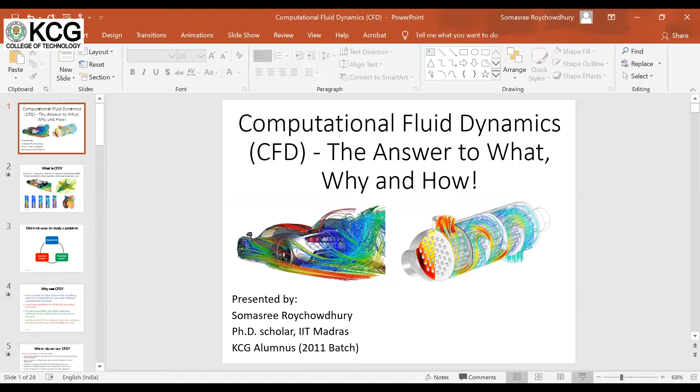Today I'll be giving my lecture on computational fluid dynamics. It will basically answer some very basic questions like what is CFD, why do we need to look into CFD, and how do we solve a problem using CFD. In this presentation, I will give a fundamental understanding of CFD. I will not go too much in depth, and I hope by the end of this session it will pique the interest of all students to go deeper and find more interest in understanding the subject.

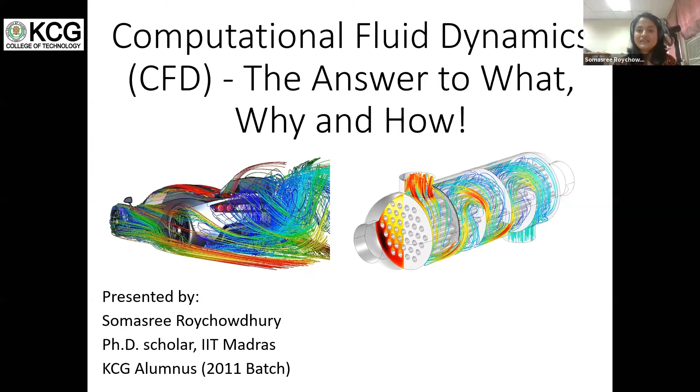So the first question: what is CFD? CFD is a computational tool that we use to solve any kind of transport phenomena equations with respect to fluid mechanics, heat transfer, or chemical reactions in any kind of system.

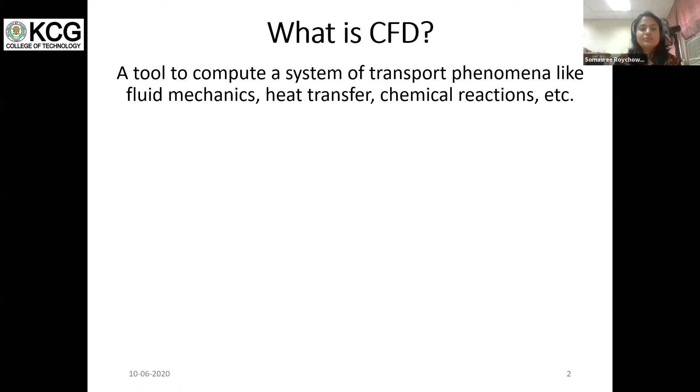For example, we may have an F1 car and we want to look into its aerodynamics, because at very high speed it is essential that the drag force acting on the car is much less. Only then can it move at very high velocity. So to study the aerodynamics of the F1 car and design and streamline the body accordingly, we can do something similar with fighter jets, or even look into commercial planes and their design, making them more aerodynamic while optimizing the energy we use.

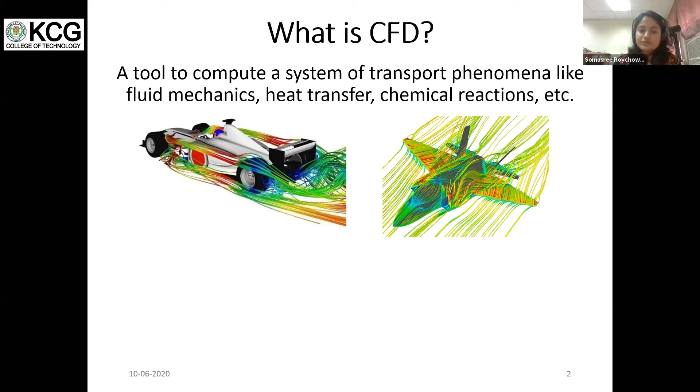Then suppose we want to study the burning characteristics of a fuel. Say we have a tray with kerosene and we're burning it. To study how exactly the flame behaves, we can do that with CFD.

Another application of CFD is in medicine. Suppose we want to design a pacemaker; we need to understand certain parameters at play inside our heart or in a blood vessel system. Using CFD, we can understand the flow of blood in and out of the heart, the pressure acting, and so on. With that, we can optimize the working of the pacemaker and design it accordingly. These are just a few examples of where we can use CFD.

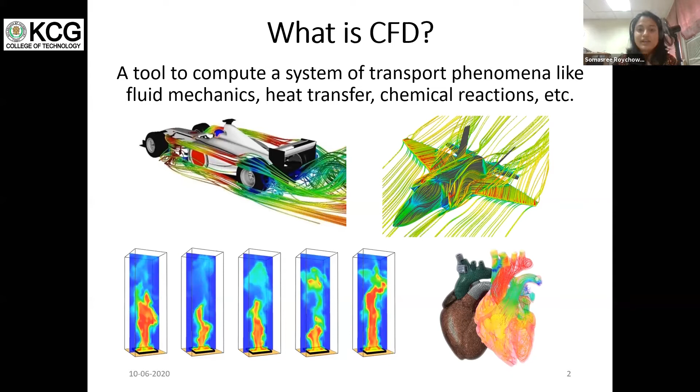Now, we can solve a problem in different ways. If we want to study the aerodynamics of a vehicle or a ship, we can study it experimentally using a wind tunnel or something of that sort, and figure out the parameters required to optimize the design aerodynamically. Or we can also do the theoretical analysis.

In theoretical analysis, we take a physical problem and formulate it in terms of certain mathematical equations, then solve those equations for certain initial and boundary conditions.

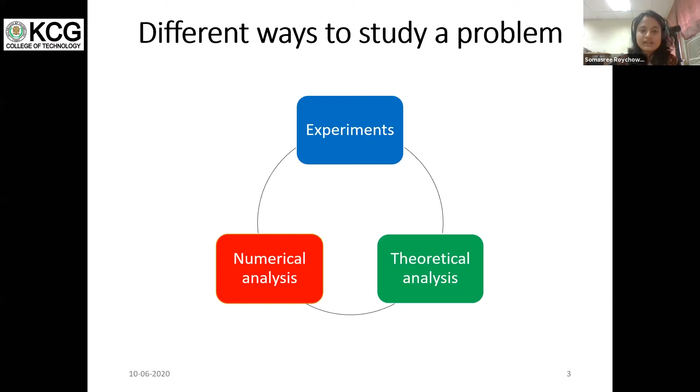The other way of solving a problem is numerical analysis. Here again, we take the physical problem and represent it in the form of mathematical equations, but instead of solving it like theoretical analysis, we solve it iteratively. So CFD is basically numerical analysis where we iteratively solve the mathematical equations and arrive at the solution. Now, why do we actually use CFD?

CFD gives an in-depth understanding with respect to flow patterns, which are very difficult to study experimentally. If you want to set up an experimental setup, you have expenses for purchasing and fabricating everything, then the measurement devices and sensors are expensive. If you just need normal measurements like thermocouple or pitot tube, it's not that expensive, but if you want a high-speed camera for flow visualization studies, that becomes costly.

So you can understand that experiments are a costly affair. But when you go for CFD, all you require is a computer. So the expense is that of a computer, and if you're using software, you need to procure the license. These are the only two costs with CFD, so it is cheaper in comparison to experimental techniques.

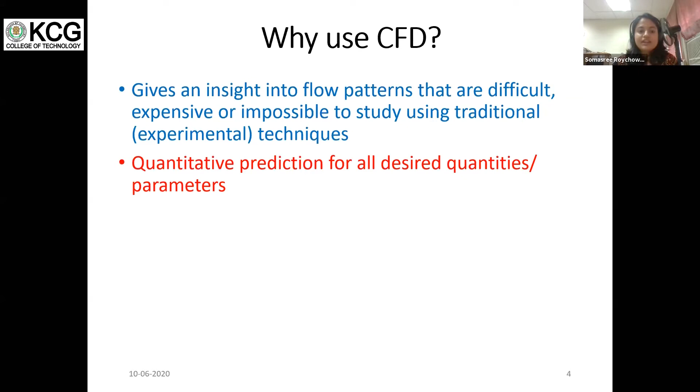In CFD, you can study various quantities and parameters, whereas in experiments you have a limited number of parameters you can study at one time. In CFD, you can study any kind of problem, using various operating conditions and simulating various types of problems with much lesser resources, that is just your computer. Finally, solutions from CFD are much faster than obtaining solutions from experiments.

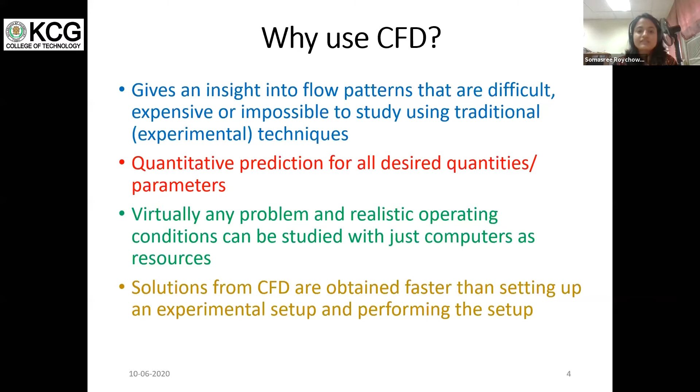In experimental study, you need to first set up your experimental setup, then do your measurements, then post-process your results and come up with the necessary graphs. In CFD, on the other hand, except for the time the computer takes to run your simulations, you can get your CFD results very fast. It doesn't take as much time as experiments. This is why CFD is advantageous.

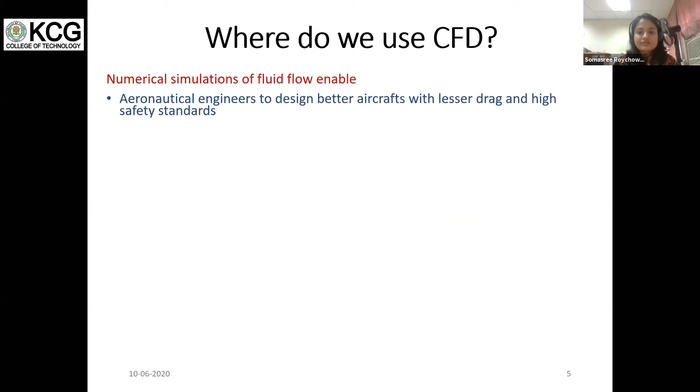Now, where do we use CFD? I've already shown a few examples earlier. A few more examples include design of aircraft for less drag and high safety standards. Space engineers use CFD for better shuttle and satellite design. Architects tend to use CFD for designing comfortable and safe living environments.

Most commercial buildings these days have centralized AC, so if you want to study how the temperature distribution is inside the room, whether proper airflow is reaching everywhere or not, all this kind of design for comfort can be done using CFD.

I've already spoken about vehicle aerodynamics. Coming to chemical engineers, whenever they are doing some chemical reaction study and want to maximize the yield of the reaction with respect to the equipment or the design of the reactor, they can also use CFD to study such problems.

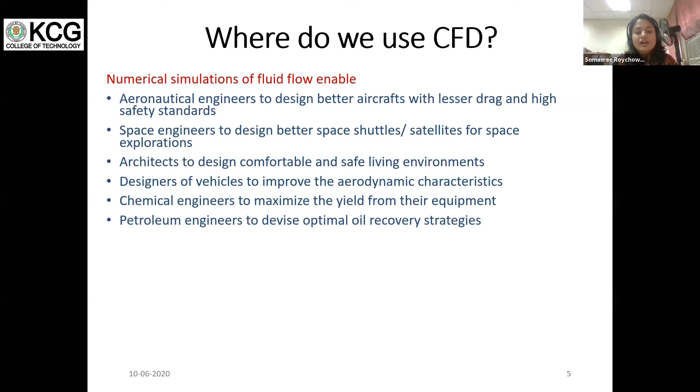Petroleum engineers can use CFD to come up with optimal oil recovery strategies at oil extraction plants. I've already stated the application of CFD in the medical field, be it the heart or the vein. CFD can even be used to study cell tissue mutating into cancer, and so on and so forth.

Meteorologists also use CFD to forecast the weather and warn us about natural disasters. There are certain health risks involved with respect to radiation, be it thermal radiation due to high temperatures or nuclear radiation. All these things can be studied using CFD, and safety experts can come up with the standards that are required.

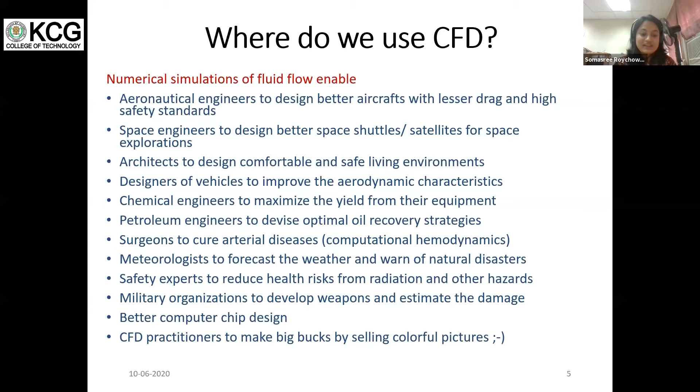Military organizations can develop weapons using CFD, and they can estimate the damage these weapons can do. And how do you think our computers and mobiles are getting smarter? That's because of better design of computer chips, which we can also obtain by using CFD. And finally, by showing all these colorful graphs, any CFD practitioner can make big bucks. So that's why we use CFD.

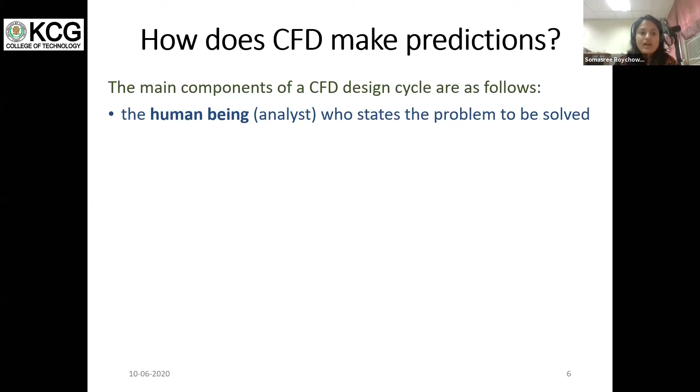Now, how does CFD make predictions? Let's get into that. What are the main components of a CFD design cycle? First, of course, we start off with a human analyst. A human being will define the problem - basically what are the flow parameters we are looking at, and what is the geometry exactly we are looking at. This is what is defined by a human being first.

Then, of course, we need scientific knowledge. If the flow is laminar, then we need to use a model corresponding to laminar. If the flow is turbulent, then we need to use the model corresponding to turbulence. So this kind of scientific knowledge is especially required to express these things mathematically.

Then, of course, we require a computer code. You can write the computer code, or you can use commercial softwares, CFD packages, which compute these mathematical models. Next, of course, computer hardware is very important.

I'm sure all of us have played computer games, and we know how painful it becomes when your games get stuck because your computer is not able to handle it. It's something similar with respect to CFD as well - the more complex your CFD simulations become, the more you need such a strong and powerful system. So hardware plays an important role.

And of course, finally, it again comes back to a human being who will inspect the entire simulation that's happening, and once the simulations converge, interpret these simulation results.

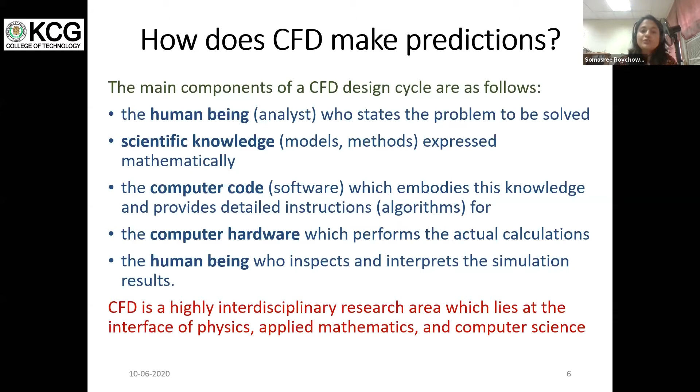The main thing I want to state with respect to CFD is that it is a highly interdisciplinary research area. It is an interface between physics, applied mathematics, and computer science. So if you have a basic understanding of all three, you will find usage of CFD much easier.

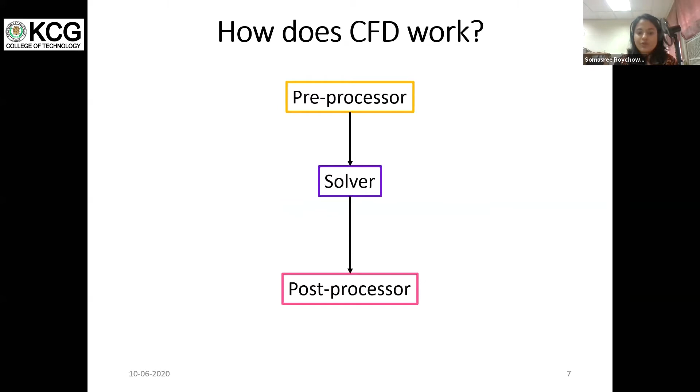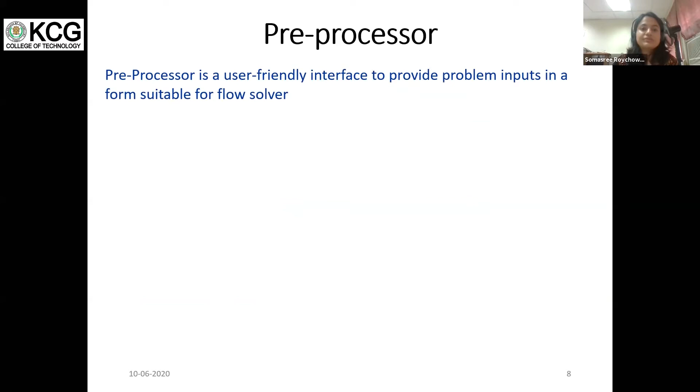So how does CFD work? CFD works in three steps basically. First step is preprocessor, then the next step is solver, and the third step is post-processor. In the preprocessor, it's a user-friendly interface where we provide all the inputs, like what is the geometry we want to look at, what is the problem we want to actually simulate. This is what we define in a preprocessor, and we feed it to the solver or the computer.

So what does a preprocessor exactly do? Define the geometry and the computational domain, grid generation. Then suppose we are looking at an unsteady problem - what is the time step size we want to take a look at? This is something we also define here. But if you're looking at a steady state problem, we need not worry about this step at all.

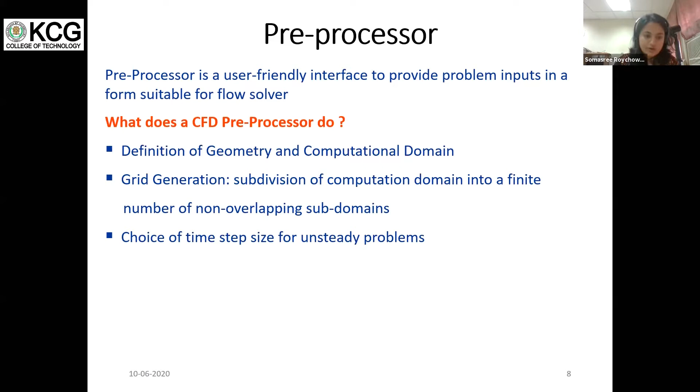Then, of course, the mathematical model that we are looking at for the different physical complexities of the problem. Next is the definition of the fluid properties - is it going to be air, is it going to be water, or is it going to be a mixture of some other gases? So these are some things we need to define. Then, of course, we define the boundary conditions and the initial conditions to the problem. And with this, we finish the pre-processing.

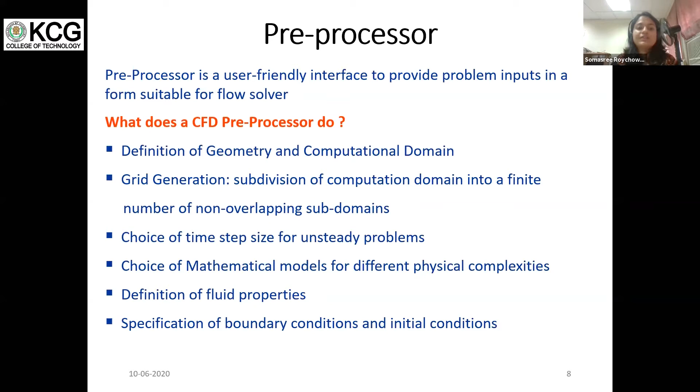So getting into geometry and computational domain in much more depth, we all know there are two types of flows: one is external flow and one is internal flow. Depending upon the type of flow, the geometry and the computational domain defined are a little different.

So for external flow, let me state that I wish to simulate - let's say there's a cricket match going on and Kohli hits a six. And I want to really simulate that ball and check whether it's going to go out of the boundary and reach six, or whether the air drag acting on the ball is so much that the ball will slow down and only fall for four. So I want to simulate something of that sort. Then what do I do?

So what I do is the ball is my geometry, and my computational domain will be something around the ball so that I can simulate the drag.

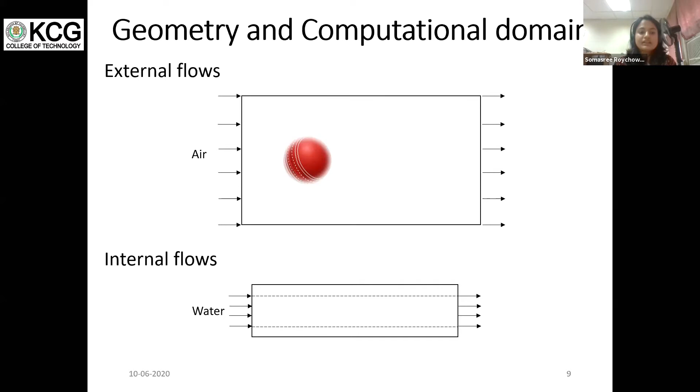But when it comes to internal flows, it's not so complicated. Suppose we take a pipe flow, we have water flowing through the pipe. Then the pipe itself becomes the geometry and the computational domain. To recap, external flow has geometry separately, and the computational domain is defined around the geometry so that the physics happening around it can be captured. But in internal flow, the computational domain and the geometry are the same.

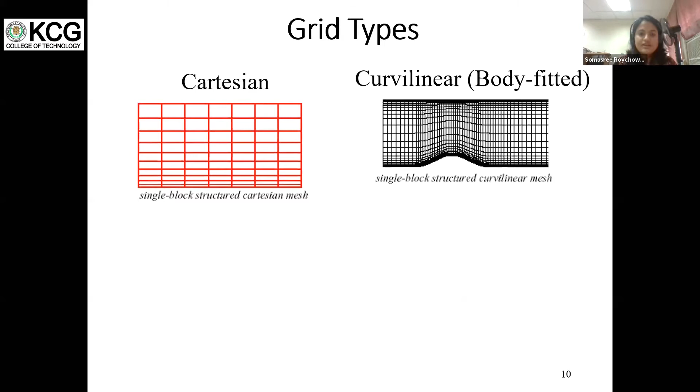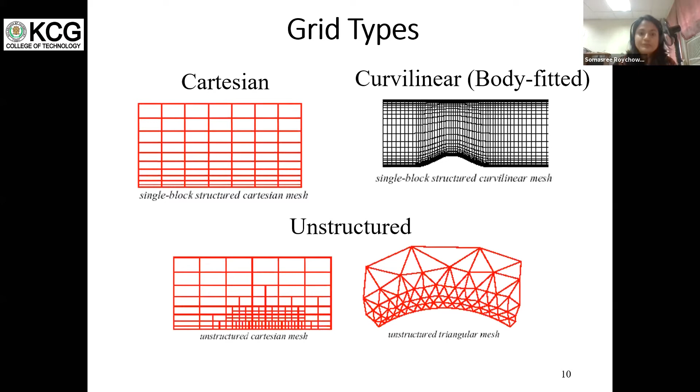Now, moving on to the different types of grids we use on the geometry and computational domain. We have the Cartesian type and the curvilinear type, and these two are called structured grids. Then we have unstructured grids also. I've shown two types of unstructured grid here, but there are plenty more types you can venture into.

After we've defined the grid, it's important to understand the different mathematical models we define for our problem. Suppose we're looking at a physical problem where, with change in time, we have change in physics - that means it's an unsteady problem. We cannot define it to be a steady problem. This is an important aspect we need to understand and accordingly define.

Then, with respect to the problem where I want to simulate the ball being hit by Kohli, suppose that day is very hot and dry - that means it's a single phase problem, I only have air in gaseous phase. But suppose that day is very wet, then what do we have? A multi-phase problem, because we have moisture in the air. So this is how we need to define whether we want single phase or multi-phase.

Then we have the different types of viscous models. When looking at an inviscid problem, we are not considering any viscous terms at all - we are essentially solving Euler's equations. But if we want to consider a viscous problem, then we look into laminar and other turbulent models. Each model has its own equations to be solved.

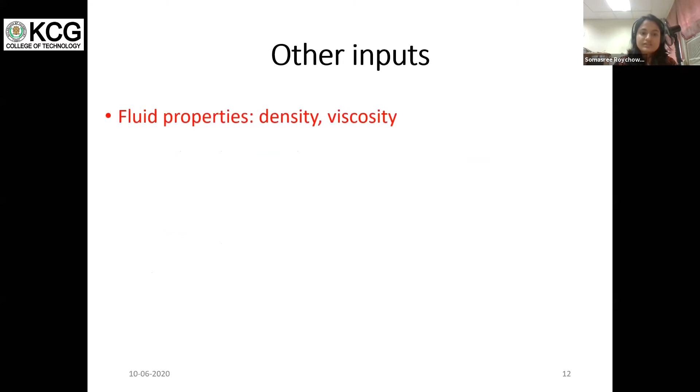Other inputs for CFD include fluid properties like density and viscosity, boundary conditions like wall or symmetry, axisymmetry, slip, no-slip, and inlet conditions like temperature, velocity, mass flow rate, pressure, etc. Now that we have defined the preprocessor, we will move on to the solver.

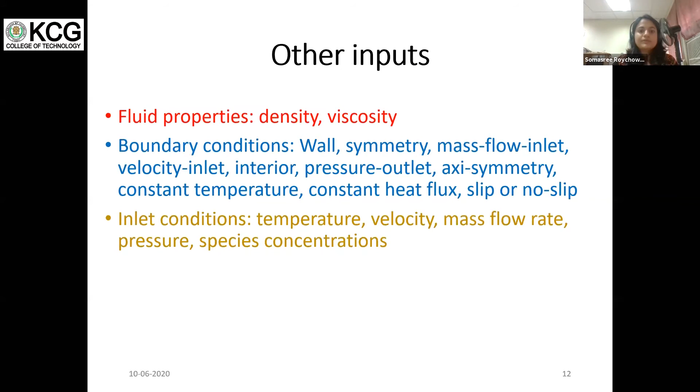So in a solver, what we essentially do is take the governing equations, discretize them, and formulate a system of algebraic equations. These systems of algebraic equations are basically solved in CFD commercial packages, which are like a black box to us. Now, if you are not concerned about discretizing it yourself and formulating these algebraic equations, you need not know much about what is exactly going on in the black box.

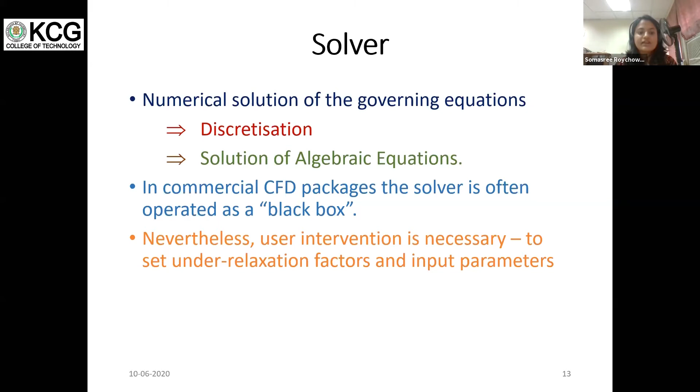But if you want to have control, if you want to understand whether the solution coming out of the black box is wrong or correct, or if there are problems you may have to solve, the code may not be converging, so you need to define some set of parameters called under relaxation factor—which one, when you should define it—to understand all this, it is important to have at least a basic understanding of what is going on in the black box.

Coming to discretization, the most basic method is the finite difference method. In finite difference method, the partial differential equations are defined in the differential form only, and they are expanded using Taylor series.

Suppose we have a grid, as you can see on the right-hand side. If I want to expand the equation du by dx plus dv by dy equal to 0 for a finite difference method at i comma j, this is the equation it will look like after discretization.

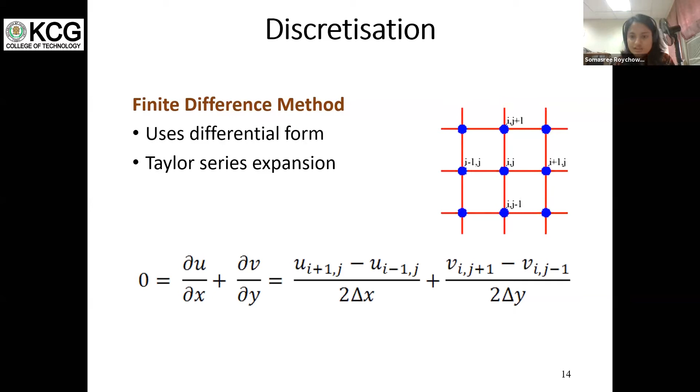Finite difference method is the most basic method. From it, we have obtained finite element method and finite volume method. Finite element method I studied during my BTech curriculum, and I'm sure you all will study it too, so I will not touch upon that. I'll be moving on to finite volume method. Both finite element and finite volume methods are actually integral forms of the PDE.

In finite volume method, suppose we have a grid. Each square geometry is considered as a cell. Let's have flow through the boundary of the cell at the center. The flow in the horizontal direction is represented as U, and in the vertical direction as V. The flow in the horizontal direction is U west, flowing in, and U east, flowing out. Similarly, in the vertical direction, flow in is V south, and flow out of the boundary is V north.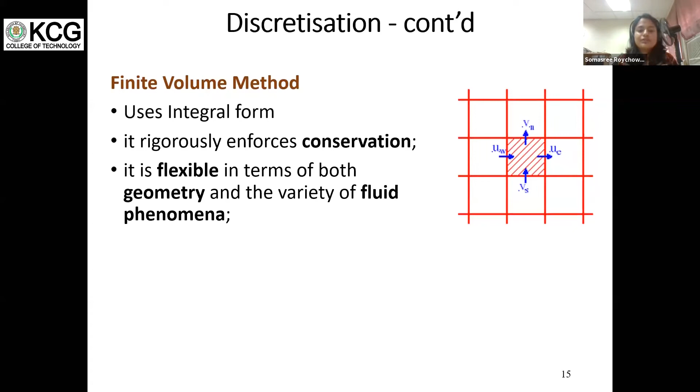Now, the advantage of finite volume method is that it is very flexible with respect to geometry. You can use any arbitrary geometry to study using FVM, and you can study any fluid phenomena. Also, as I've stated, it is directly relatable to physical quantities like mass, momentum, and so on. That is the advantage of finite volume method.

Now, what is the discretization process? It is nothing but converting a system of PDEs into a set of algebraic equations by generating a mesh, which may be structured or unstructured. Here we can play around with the mesh size, be it a coarse mesh with big cell size, or a refined mesh with small cell size. This is how we can play around, and of course the mesh will define the space discretization.

If we want a high order approximation or high accuracy, we tend to go for a refined mesh. If we want low order accuracy or low order approximation, then we go for a coarse mesh.

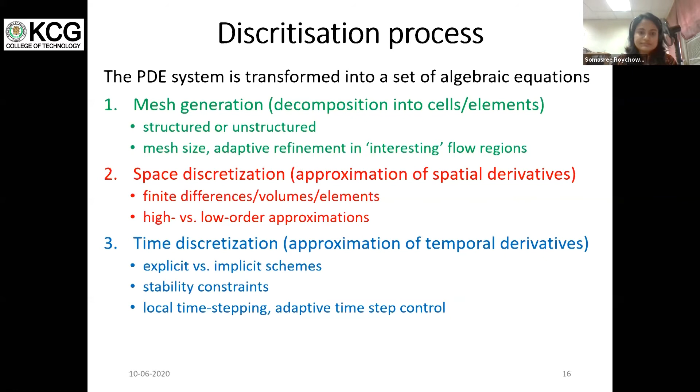Now, what are these partial differential equations that we are exactly solving? We are looking into conservation of mass, conservation of momentum, conservation of energy. If you're having reaction, conservation of species, and so on and so forth. These are the governing equations that we solve in any system.

These governing equations can be in integral form or differential form. Of course, in FVM, we are defining them in an integral form. And what we do in FVM is for every control volume, the set of equations that we have formulated, we will combine all of them into a simultaneous non-linear algebraic equation in the form of AX equals B.

So this non-linear matrix equation we solve using various matrix algorithms like Gauss elimination, Gauss-Seidel, line iterative process, alternating directional implicit, strongly implicit scheme, conjugate gradient methods. Now, based on the type of equation that you're using, the type of accuracy that you need, and the type of computational time you're willing to spend, that is what will define which solution algorithm you wish to choose with respect to your problem.

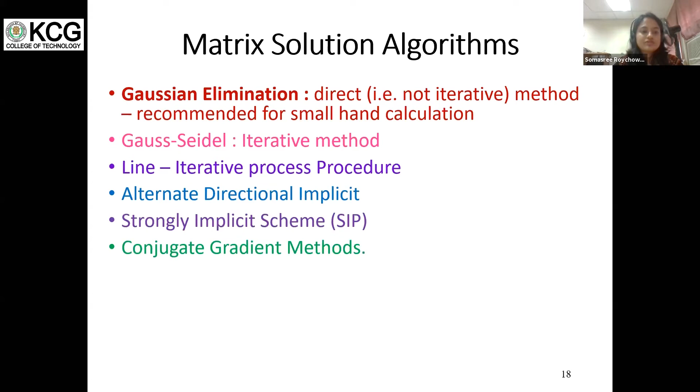So there's no hard and fast rule that you have to stick to one of these. You can actually use any one, but that will be defined by your own constraints. But with everything said and done, the most important thing that everybody needs to consider is the convergence criteria.

Now, when you have a solution which is changing with respect to iterations, what you will do is you will formulate the error. Suppose you have an iteration n and you have iteration n minus 1, you will compare the two and find what is the error between the two.

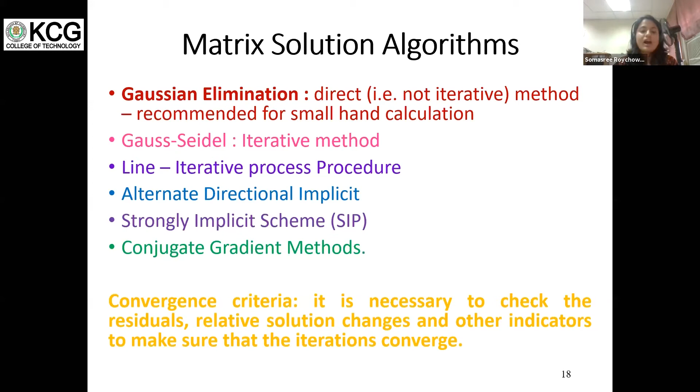Generally in academia, the error is taken to be 10 power minus 4, and in the research field, the error is taken to be 10 power minus 6. This is called the convergence criteria. Now, you will keep iterating your solution till you reach this convergence criteria, and that is when you will actually say that your solution has converged. So until then, you cannot call your solution to have converged.

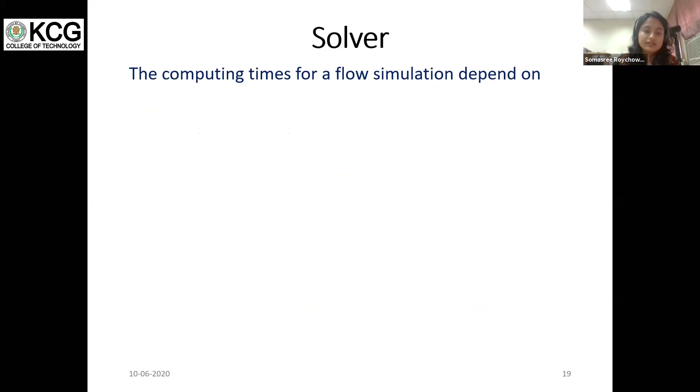Now, when we're coming to a solver, how does your computing time for any flow simulation get defined? Of course, the choice of the numerical algorithm that you have used, that defines the computing time.

Then the convergence criteria that you have used, the mesh quality that you use. If you use a coarse mesh, it actually takes much lesser time. If you use a refined mesh, then it actually takes much more time. Then of course your time step also, if you have an unsteady problem.

Then apart from that, if you are programming it in some programming language like Fortran, C, C++, depending upon your code, it can take lesser or more time. Then, as I've already stated, hardware is very important with respect to the computing time.

And yes, apart from hardware, if you are taking a problem and running it on a serial processor, or if you're taking a problem and running it on a parallel processor, then the parallel processor will be much quicker. So the parallelization also defines the computing time.

Apart from that, how do we look into the quality of the simulation results? Again, the mathematical model does define the quality of simulation, and then the assumptions that you have actually used to define your solve for your mathematical model, that defines the quality of the simulation.

The mesh plays a very important role with respect to the quality of simulation, because if the mesh is coarse, your quality of the solution may not be that great. But if your mesh quality is high, the solution gets better and better as well. The time step is similar to that of mesh only. If the time step is small, then your solution may get better.

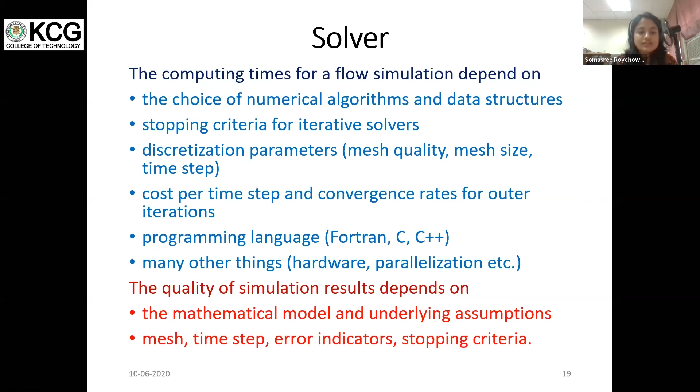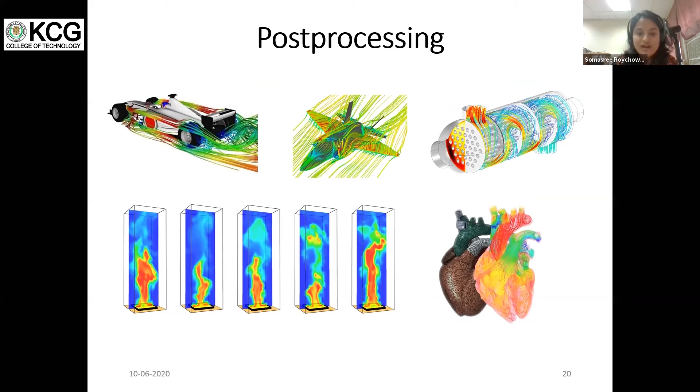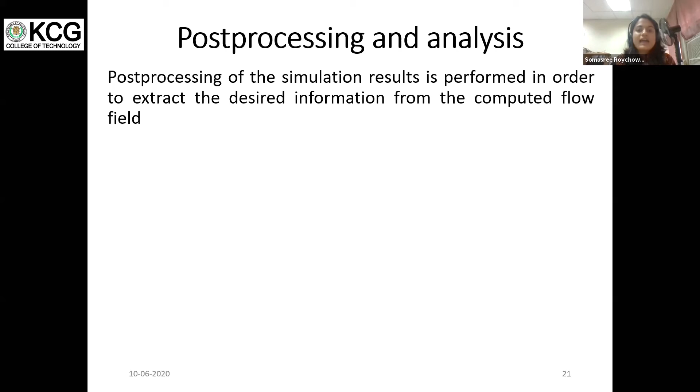Now coming to the final step, post-processing. This is of course our most favorite part, because that is where we find such colorful fluid dynamic pictures. So how do we exactly arrive at such beautiful pictures? What is the process that we go through in post-processing? In post-processing, we take the simulation results from the solver and convert it into the desired information.

It may be calculation of stream function, vorticity function, lift, drag. It may be representation of the data in the form of a straight line like an XY plot, or a 2D contour graph, or a 3D cut plane, isosurfaces, or arrow plots, which I'll also show you later on. We can even have animations. So these are some things we do in post-processing.

Apart from that, you can derive huge amounts of data and use statistical tools to do systematic data analysis. And finally, if you are writing a code yourself to solve these equations, how will you know how to debug your code if you get stuck? This is where you need to post-process a little, see how your results are turning out, and then you will understand where to go and debug.

After debugging, let's say your code has run successfully and you are getting results. How do you verify your results? How do you verify that your code is actually giving you correct solutions? This is where you validate your results with some experimental results that are already available. So this is what we do as part of post-processing.

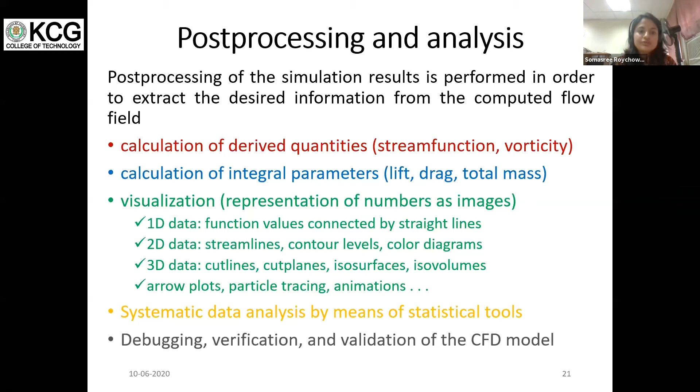So let's come to an example of a simple CFD problem. Maybe you can try it on your own in any kind of CFD package as well. Let's consider a flow between two parallel plates, so essentially it's a two-dimensional problem, a two-dimensional geometry. Let us also consider that there's a square geometry sitting on top of the bottom plate.

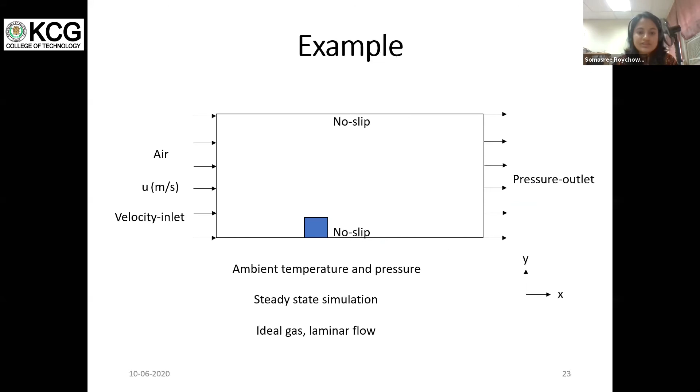Once you have solved, you can actually draw any kind of mesh you want for this geometry. It need not be structured, you can use structured, unstructured, whatever it may be. You can use any kind of CFD package to do the simulations. Once you're done with the simulation, you can extract the results.

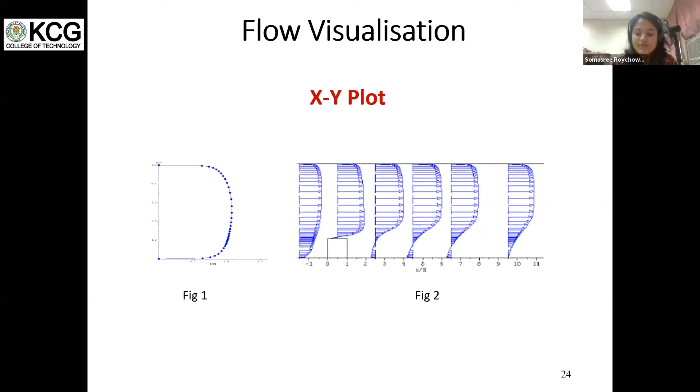Then you can plot some XY plots like this. On the left-hand side, figure 1 is basically the velocity profile inside the pipe, in between the two parallel plates. The flow hasn't yet reached the rib, so the flow pattern is seen to be parabolic as shown in figure 1. But once it reaches the rib and flows past it, how the flow pattern varies is something you can plot using an XY plot.

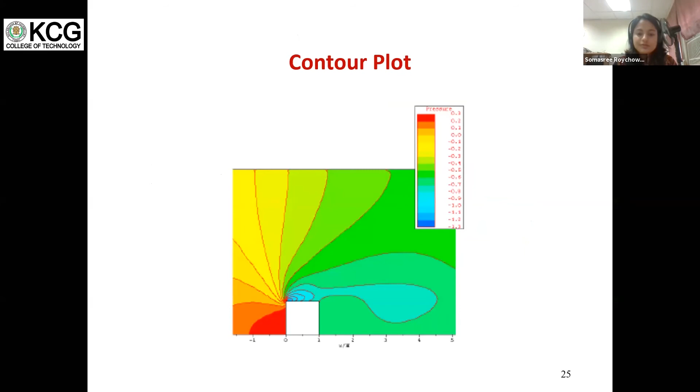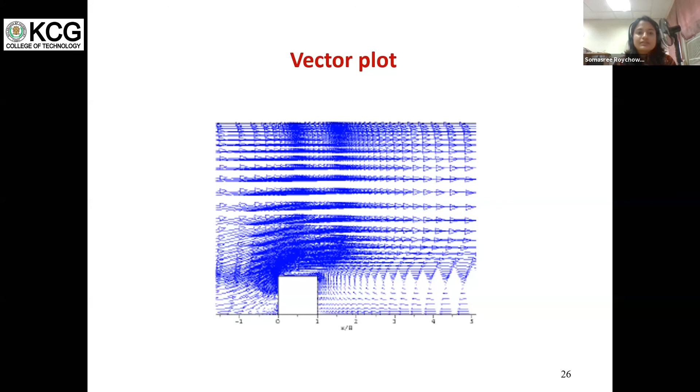Then this is actually the vector plot. You can especially look into the velocity plots, how the velocity profiles look. So using a vector plot, you can take a look at that.

So finally, at the end of my presentation, what I wish to share is that it is actually good to know a CFD software, because these days with respect to placement or when you go on to higher studies, it's not compulsory, but there is a certain expectation that you may or may not know a software. If you know a software, it's better. This may be with respect to FEA also, it can be with respect to CFD also.

But more than just knowing the software, the main expectation that companies or even higher studies have is that you understand what is going on in that black box. Nobody is expecting you to be a thorough master of what's going on in the black box, but you should have an idea of what's going on in it. Because when you are defining a certain problem to that black box, is the solution that's coming out correct or not? You will not realize this unless you understand what is exactly going on in the black box. So with this, I conclude my presentation. Thank you.

Madam, there are a few questions in the chat box. Yes, sir. One question is from Crescenta, our student.

The question is about the Euler equation not having a viscous term either, so why is Bernoulli's equation used instead of Euler's equation for an inviscid model? Okay, yes. So actually, as I have just stated, an Euler equation can be applied to any kind of flow, but when you have flow along the streamline, that is when you actually use Bernoulli's equation. So Euler equation is a generic form, Bernoulli's equation is more specific. And yes, as you said, it's actually Euler equation that is mainly used. Suppose you have a flow which is completely streamlined, that's when you can use Bernoulli's equation.